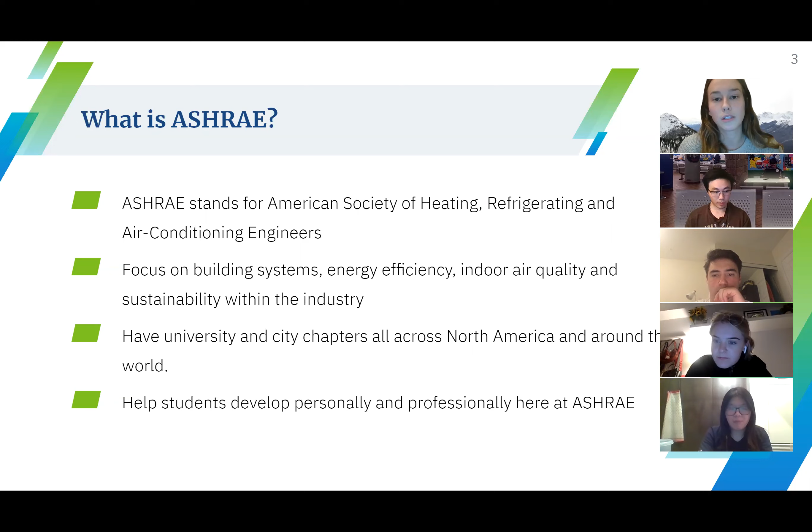So some of our values at ASHRAE UofT chapter specifically are to create a safe space, so an environment for members to learn off each other and support one another. We have a mandate to sustainability to serve the built environment and to shape a more sustainable future. And also we like to think that we have good networking here to build lasting connections with ASHRAE and the community and industry.

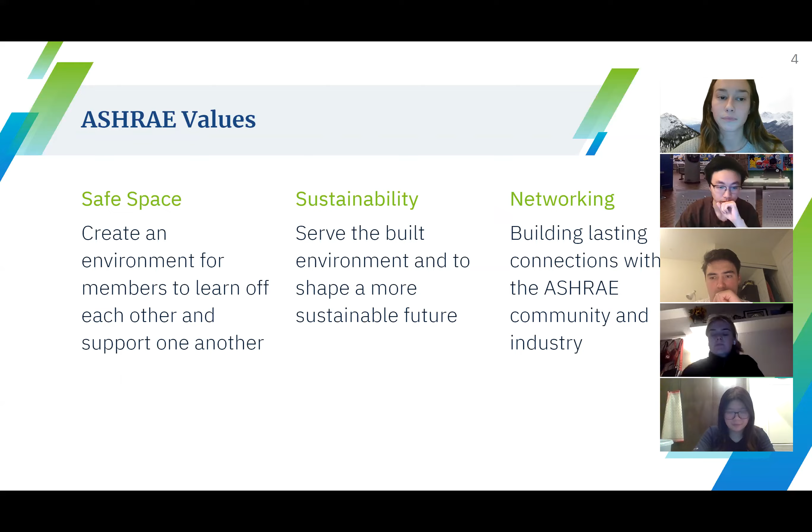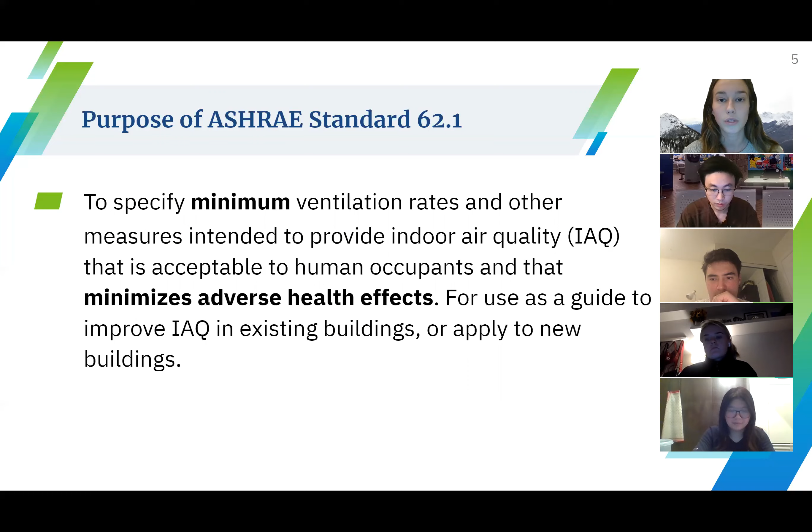So to start off, the purpose of ASHRAE Standard 62.1 is essentially to specify minimum ventilation rates and other measures intended to provide indoor air quality that is acceptable to human occupants and that minimizes adverse health effects. A large part of indoor air quality is making sure that people aren't breathing in air that is bad for them or contaminated by things that can be harmful. For use as a guide, to improve indoor air quality in existing buildings or to apply to new buildings. So this standard applies to all buildings, but there are exceptions.

But first I'll go over the scope of ASHRAE 62.1. So essentially it is spaces in buildings except those that are residential and non-transient, which basically means just that they're contained to their household. So any home that has just a family living in it, or is, you know, out in the countryside all by itself. It also defines requirements for ventilation and air cleaning system design, installation, commissioning, operation and maintenance. And some of our other ASHRAE members will be going over those things tonight in more detail.

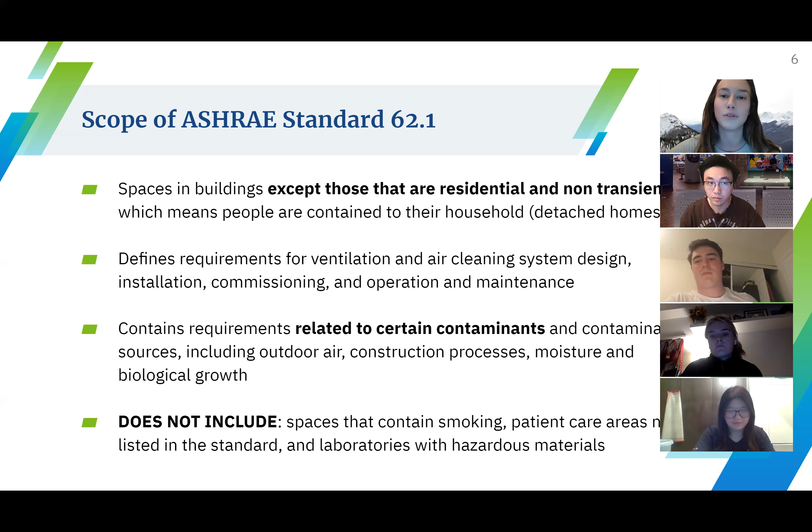And then it also contains requirements related to certain contaminants and contaminant sources, including outdoor air, construction process, moisture, and biological growth. The things it does not include are spaces that contain smoking, patient care areas not listed in the standard, and also laboratories, because they have hazardous materials that you can't really account for in a standard, and you need to kind of have a separate guideline for that.

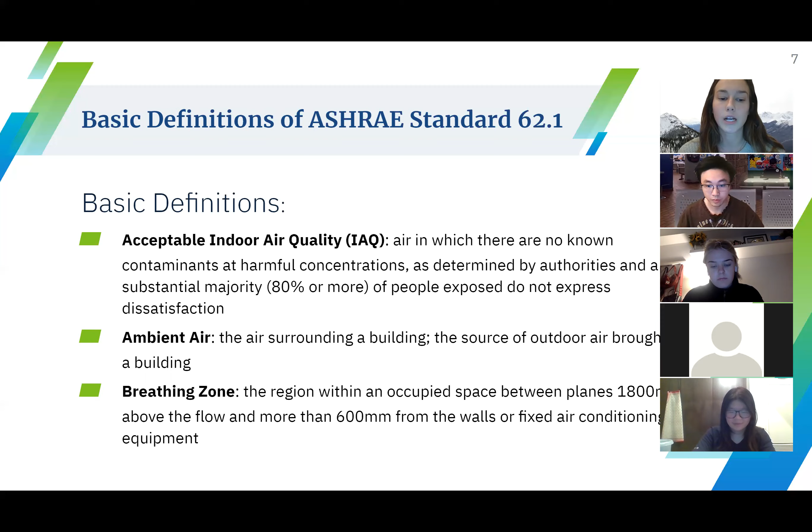So just to start off with some basic definitions, acceptable indoor air quality, or IAQ, is air in which there are no contaminants at harmful concentrations, which is determined by authorities, and a substantial majority of people do not express dissatisfaction. Ambient air is the air surrounding a building, the source of air brought into a building. And then breathing zone is the region within an occupied space between planes of 1,800 millimeters above floor and more than 600 millimeters from the walls or fixed air conditioning equipment. That's pretty technical, but I just thought I would bring it up because it does come up a lot in the following slides.

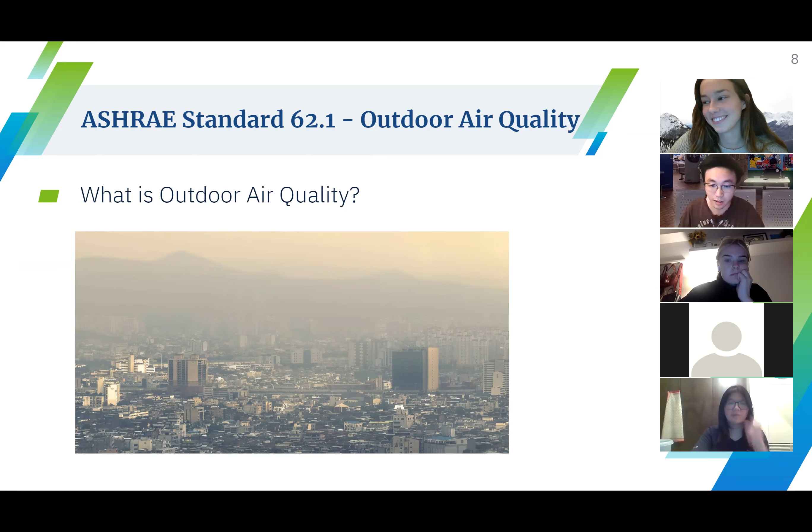Canada limits these concentrations to 30 micrograms per meters cubed per 24 hours for PM 2.5 and 65 parts per billion per 8 hours for ozone. Next slide.

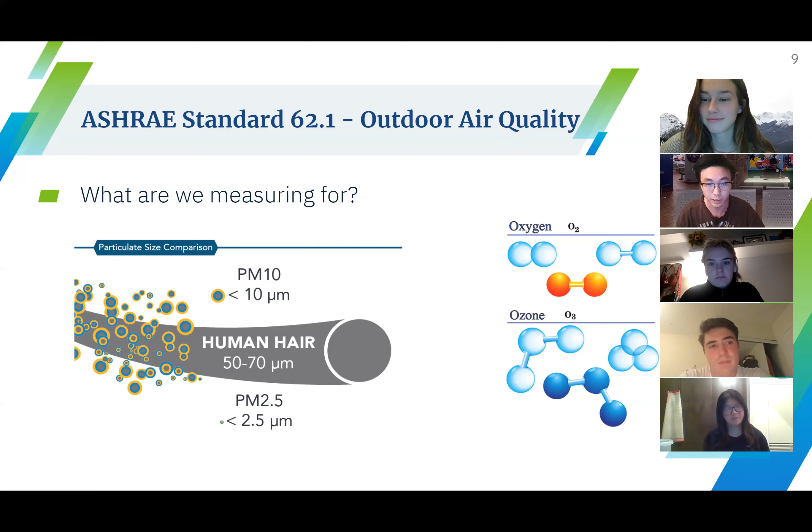And why are we actually concerned about outdoor air quality instead of indoor air quality? Well, the obvious reason is that we want to keep our outdoor air fresh so that our indoor air stays fresh as well. Outdoor air quality actually contributes to a lot of sources when we determine indoor air quality. The pollutants outdoors are very harmful to your health. And since it's outside, it can be minimized.

But since the same air is traveling indoors, we have to make sure that the outdoor air is healthy as well. So for the indoor air, there has to be proper ventilation and air cleaning systems to make sure that there's acceptable indoor air quality to avoid these risks.

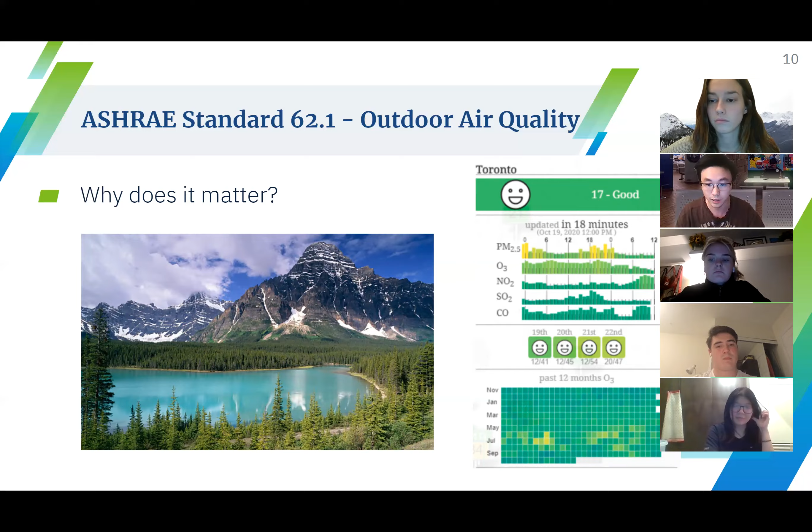So we'll be going over some of the different kinds of systems and equipment described in Standard 62.1 in terms of the systems and equipment section. One very important part of systems and equipment is obviously particle matter removal. The MERV rating ranges from 1 to 16. The higher the MERV rating on a filter, the fewer dust particles and other contaminants can pass through it.

ASHRAE designed the MERV scale to represent a filter's worst possible performance at removing particles 0.3 to 10 microns in size. Some of the most common particles that filters are tested for include pollen, dust particles, carpet fibers, mold spores, pet dander, bacteria, and tobacco smoke.

You might think that a higher MERV rating would automatically be better, but it's not. The higher the MERV rating, the smaller the pores are for air to flow through the HVAC filter. This can create more resistance in airflow than a system is designed to manage, thus making it inefficient. Therefore, these filters with higher MERV ratings need to be changed more frequently. Next slide, please.

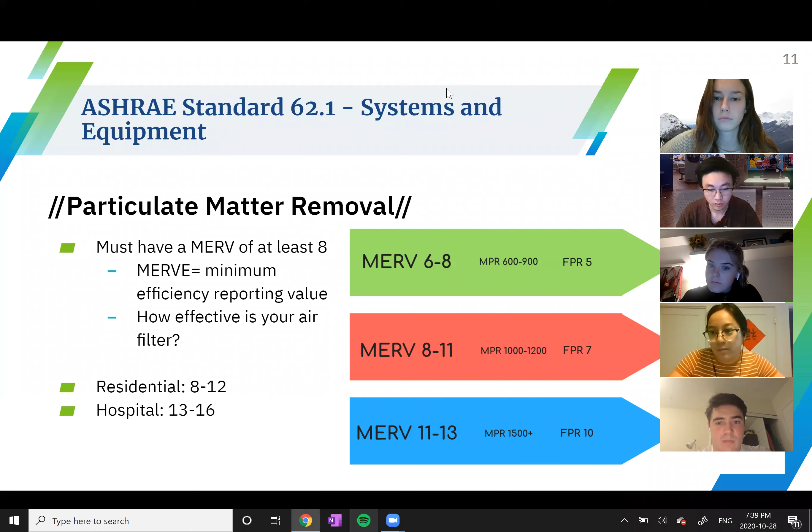Next slide. Yeah. No. Building exfiltration. Yes.

So it's best to have slightly more air intake than exhaust. This creates positive air pressure, which reduces dead spots inside the building. So it increases air circulation and it prevents dust from coming in through unfiltered openings. Next slide, please.

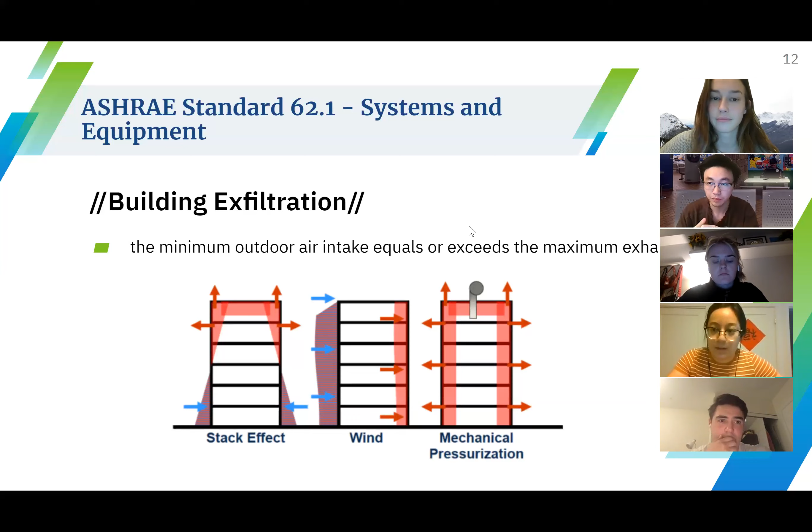Another important factor in systems and equipment is air classification and recirculation. ASHRAE divides indoor air into 4 classes that describe the level of contamination within the air in a given zone. Air classes are important because they govern the ability to recirculate air both within a given space as well as within a given system. Class 1 air is considered generally clean and without significant odor and is representative of the air in an office or classroom.

Class 1 air can be recirculated to any space type, including 1, 2, 3, and 4. Class 2 air is considered moderately contaminated and odorous. This includes dining areas and fitness facilities. Class 2 air can be recirculated to similar Class 2, 3, and 4 areas. Class 3 and 4 are zones with significant contamination and odors. This includes janitor's closets, lab exhaust, and commercial kitchen exhaust. Class 4, therefore, cannot be recirculated even within itself and must be immediately exhausted.

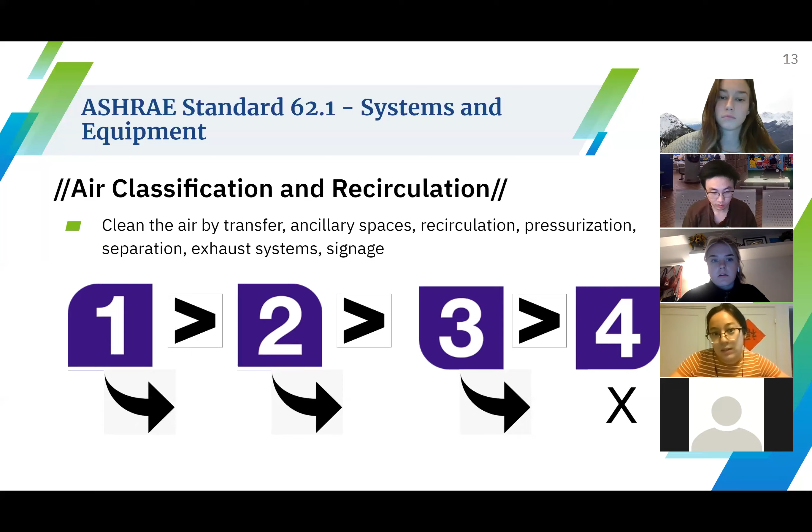Okay, so I'll talk about other systems and equipment that are important for ASHRAE 62.1, and this is the ventilation systems control. So mechanical ventilation systems need controls that are either automatic or manual, and this is to help the fan system operate to deliver specific loads. So the system needs to be designed to maintain the minimum outdoor airflow as required in Section 6, and that varies depending on the space.

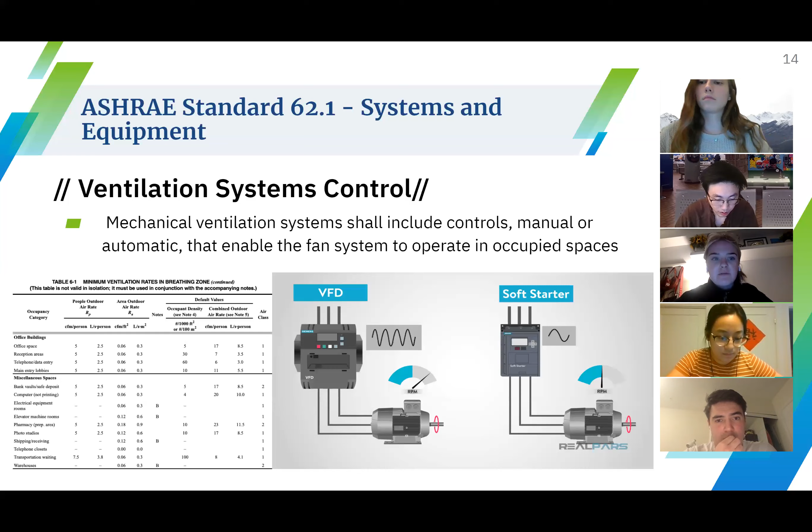So whether that's an office space or an event space, ASHRAE has different standards specific to each one, and a common one for fans is a variable frequency drive, which is a VFD, and these are motor controls that are good for saving energy because they adjust automatically depending on required air loading and control how much inflow and outflow you can get. Next slide.

An additional system and equipment to consider is ozone generating devices, or air cleaning devices that produce ozone. So any air cleaning device that uses electricity during the process to clean the air actually has the potential to generate ozone. And ozone generation is associated with certain things like high voltage coronas, pin ionizers, and any type of UV light with a smaller wavelength can produce ozone.

And as most of us know, ozone is harmful for human health, and exposure to ozone creates a risk for a variety of different symptoms and diseases of the respiratory tract. So obviously it's not good to have ozone in your space to breathe. Obviously that causes issues, and there's little known about long-term effects.

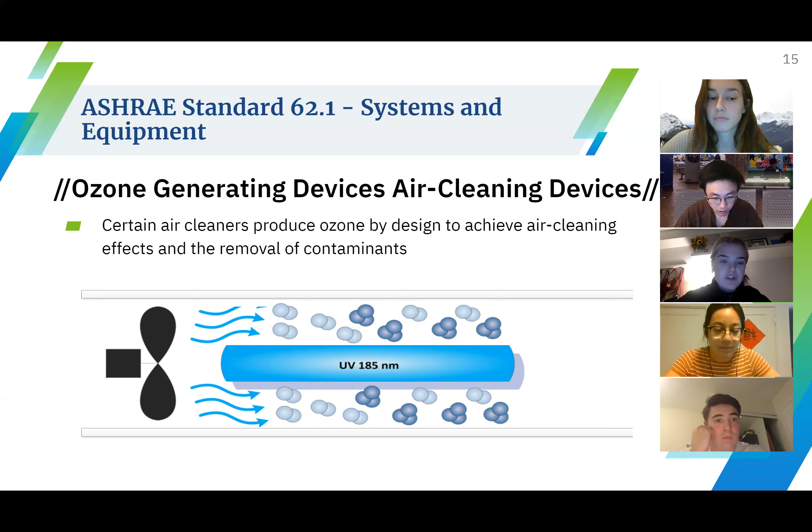And although ASHRAE has a few safe ozone levels, there is a consensus that there's not necessarily a safe level, and standards or safe practice is just that ozone emission is undesirable. So if possible, any alternative should be used instead, as this emission is negative and has a poor impact on the overall indoor air quality. So use caution with any type of ozone generating device. Next slide.

Okay, I'll be talking about the different procedures for determining minimum ventilation parameters. The ASHRAE standard includes 3 alternative procedures. The first one outlined here is the ventilation rate procedure, which prescribes minimum outdoor airflow intake rates for an occupiable space. These rates are determined based on physiological needs and subjective evaluation using guidelines and formulas from Section 6.2 of the standard.

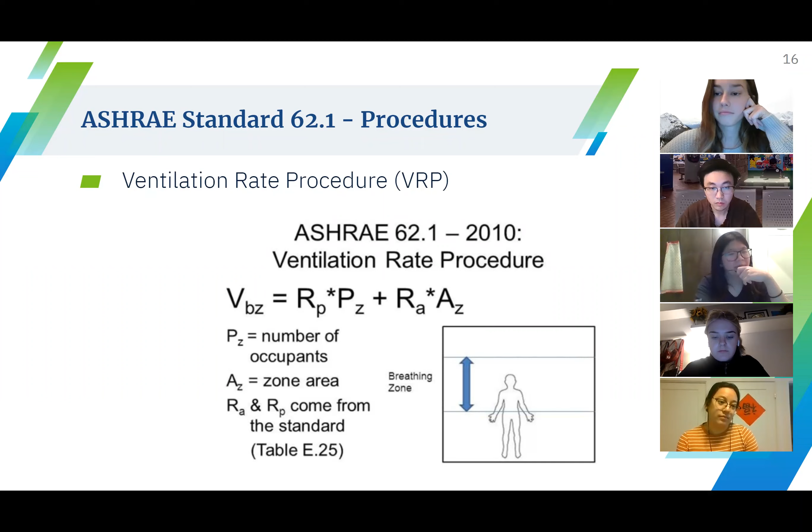The second procedure is the indoor air quality procedure, where the required outdoor airflow intake rate for a space is determined based on performance criteria. So these criteria include contaminant sources, contaminant concentration limits, and the level of perceived indoor air quality. So some examples of contaminants are carbon monoxide, nitrogen oxides, and other volatile organic compounds. Each contaminant also needs to be minimized in its own way, so mechanical systems are then used to either clean or remove them from the space.

This procedure is a really tedious process because it requires designers to first identify all the contaminants of concern, and then identify both indoor and outdoor sources of each contaminant and the emission rates from these sources. And then they have to specify a concentration limit for each of them, and then use mass balance calculations to determine the outdoor airflow rate necessary to fit these restrictions.

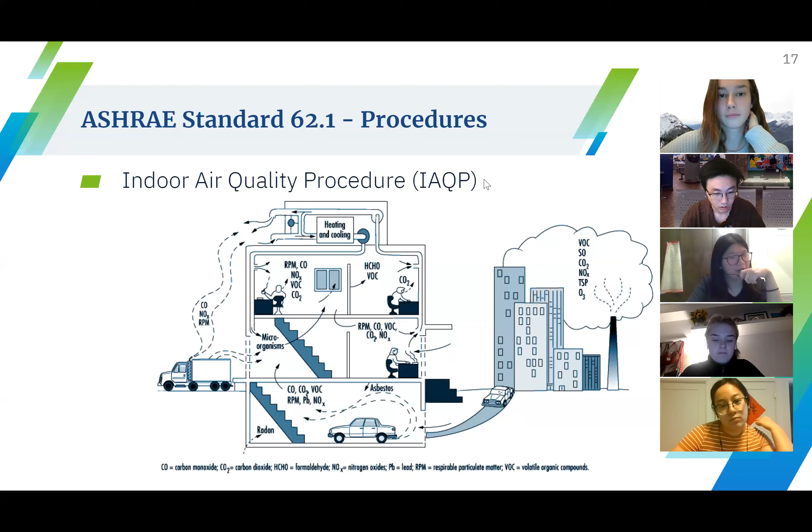So this procedure is not recommended for small scale projects because of how long and research intensive the whole process is. Next.

The last procedure is the natural ventilation procedure, which is used in spaces where ventilation is provided from the outdoors through windows or doors. It prescribes the minimum outdoor air openings required for proper natural ventilation. It's not really recommended for this procedure to be used alone. Spaces rarely rely fully on natural ventilation because this way outdoor air temperature and weather can also come indoors, which may be detrimental to occupant comfort.

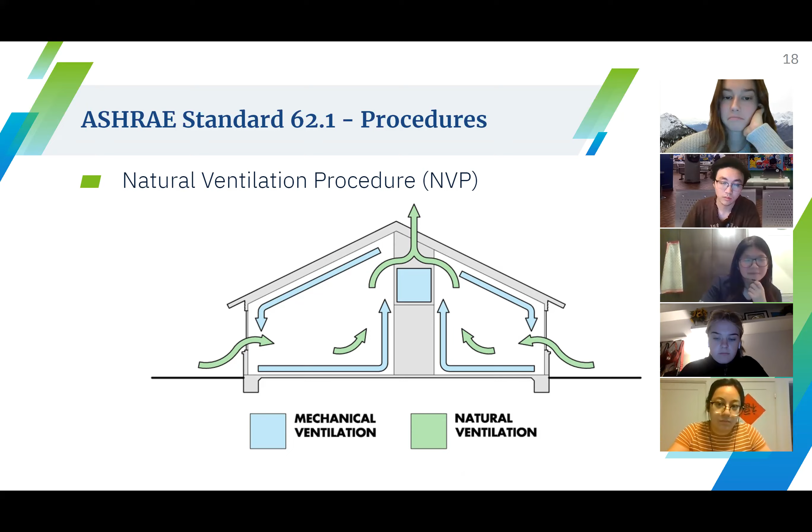So I'm going to be talking a bit about the standard with respect to construction and then the starting up of either a brand new system or a revamped system. So during construction, the standard actually already covers this, and we need to use ventilation systems for new and existing buildings to remove dust, which is a major byproduct of construction. Systems also need to have filters where available to catch these small particles. We also need to protect materials from additional moisture, especially insulation or wood, because this could cause rot and then rusting on steel as well.

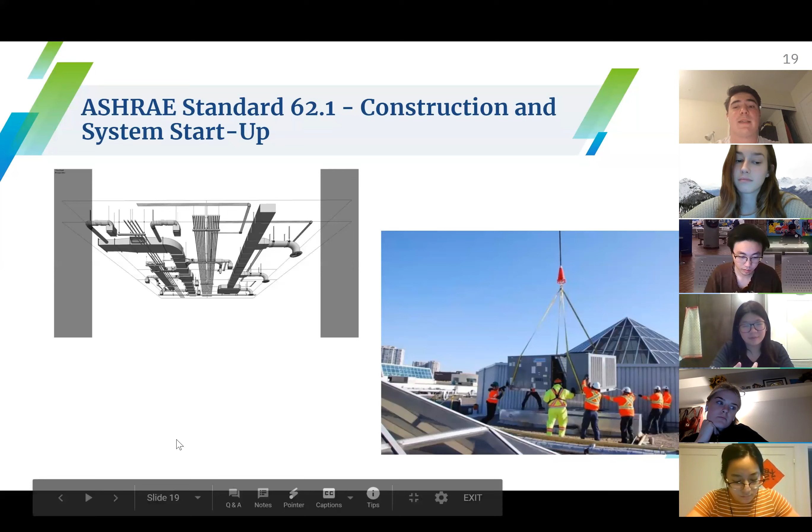During system startup, we also have to be careful with respect to ventilation for newly installed air handling systems, as well as existing air handling systems undergoing supply air or outdoor airflow reduction. For system startup, ventilators need to be clean of all debris, which needs to be done prior to the startup of any system. And each ventilation system should be tested in order to demonstrate it works as designed. Can you go to the next slide, please?

After this, we need to verify the space provided for the routine maintenance and inspection is unobstructed, and this needs to take place every month, as well as the treatment to limit growth of microbiological contaminants every month. Finally, we need to verify the space provided for routine maintenance and inspection of equipment components is unobstructed, check for the pressure drop and schedule replacement dates of filters, clean or replace necessary filters, and then also check the ultraviolet lamp, and this needs to take place every 3 months.

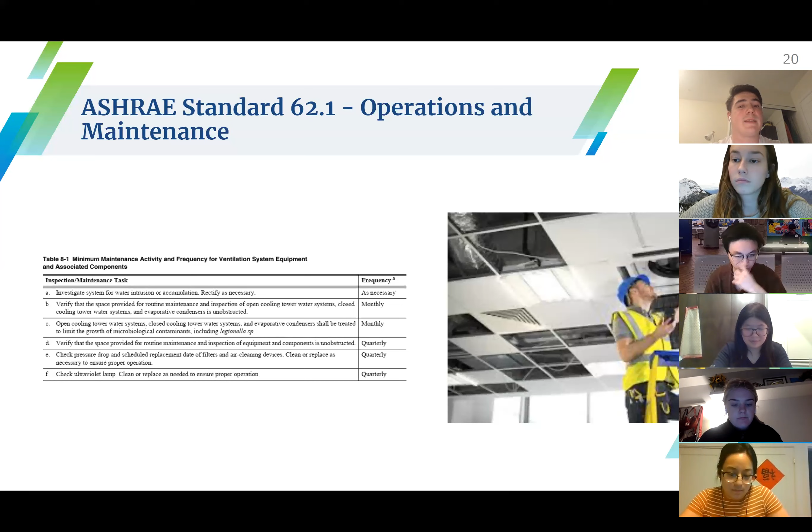Finally, each of these systems will come with an operation and maintenance manual, and these manuals will override the standard with respect to maintenance, but also construction, because certain systems might have very specific needs. And I think with that, we have gone through the standard. So if anyone has any questions about any of this, please go ahead. Yeah. Feel free to ask any questions you have.